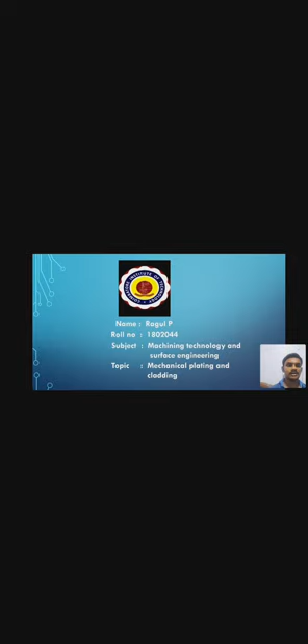So today we are going to see about mechanical plating and cladding. At the end of this video, you will come to know what is meant by mechanical plating and cladding, what are the components of mechanical plating and the types of cladding.

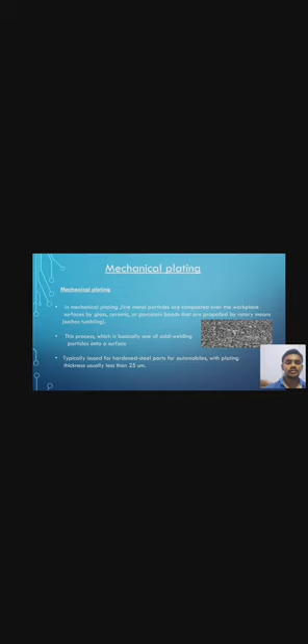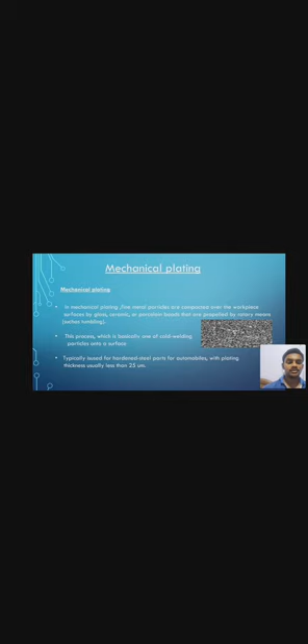So mechanical plating. Mechanical plating imparts the coating by cold welding fine metal particles to a workpiece. Joining takes place without fusion or heating at the interface of the two parts to be welded. Unlike fusion welding, no liquid or molten phase is present in the joint. Typically it's used for hardened steel parts for automobiles with plating thickness less than 25 micrometer.

Next, mechanical plating, other names. Some of the other names are mechanical coating, peen plating, impact coating. As you can see in this picture, glass beads are sprayed along with the metal powder to the surface of the material that is needed to be plated.

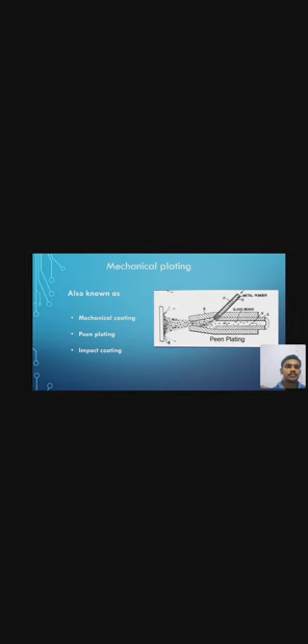Process of mechanical plating. First, descaling and cleaning is done to remove any soil or other particles deposited on the workpiece. They are generally carried out in the tumbler or in a separate cleaning system. After cleaning, the parts are prepared with water, medium, and the surface conditioners. The accelerators and the promoters provide proper chemical environment for the plating to occur, and also maintain pH at 1 to 2 to prevent oxidation and promote adhesion, which is very important.

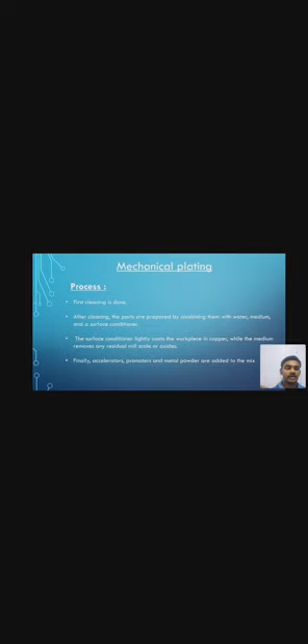Next, coating materials that are used for mechanical plating include zinc, cadmium, tin, copper, and aluminum. Among these five, zinc is the most used coating material.

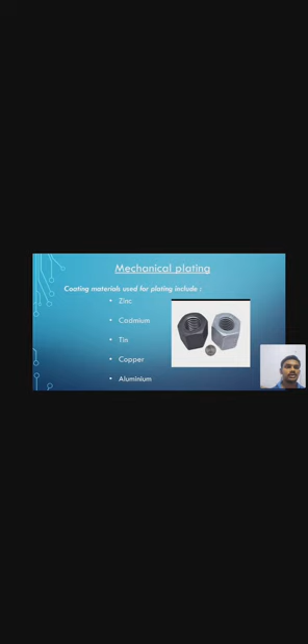Next, components of mechanical plating. First, plating barrels or tumbler. It's the most important part of the mechanical plating machine. It has a tulip design, as you can see, and it's made of steel or stainless steel. It has an acid resistant coated layer on the inside to prevent any corrosion that occurs while pouring of acids or some other components.

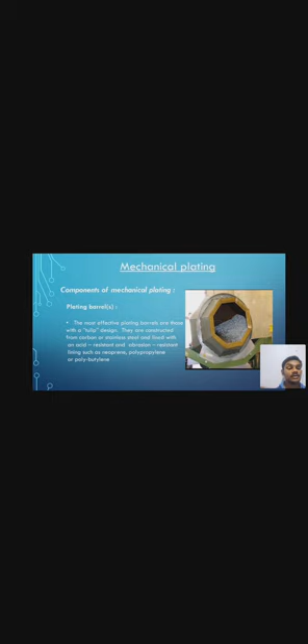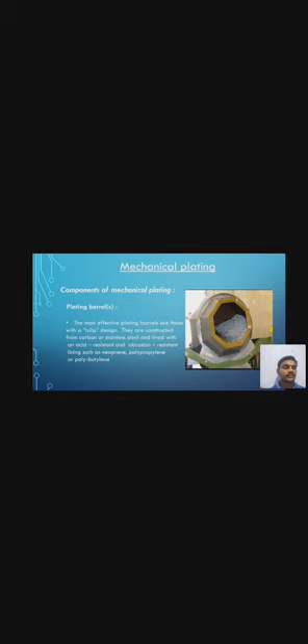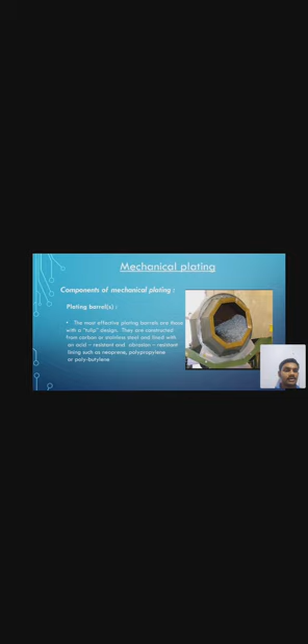So the working volume of the barrel is generally about 25 to 30% of the total volume for most plating processes. The tumbler is usually run at a speed of 60 rpm, but it can also vary according to the needs of the plating. If it runs too fast, then lumpy deposits will form on the workpiece. If the speed is too slow, then the metal powder will not be deposited on the workpiece. So these are some of its drawbacks.

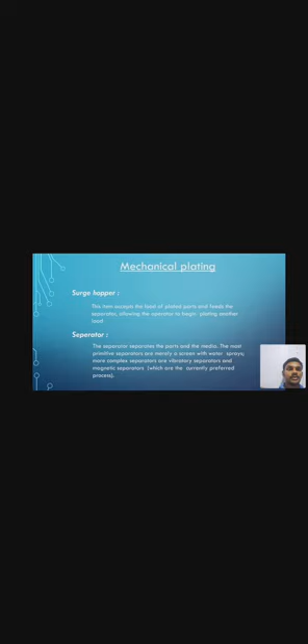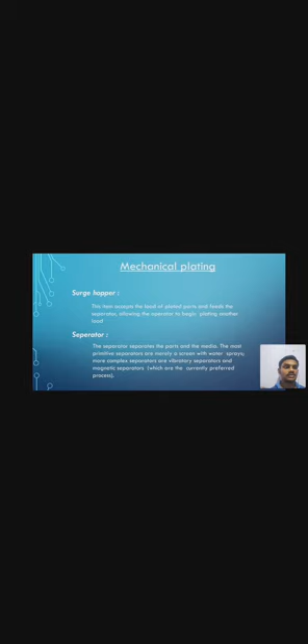Next is the surge hopper. The plated parts come into the surge hopper and then to the separator, allowing the operator to perform the next sets of operations. Separator. Next component is the separator. Separator separates the coated workpiece from the medium after coating. It can be as simple as a screen with water nozzles or as complicated as a vibrating system with magnetic separators.

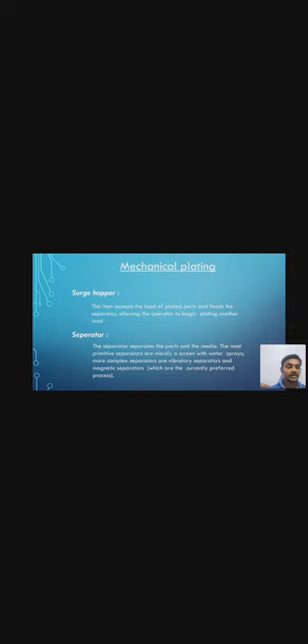Next is the chromator. Chromator is optional, because if you need any corrosion protection, you can use a chromate by spraying with the chromate. Dryer. The next component is the dryer. Workpieces are taken to the dryer to remove any moisture that is present on them. Usually centrifugal dryers are used. However, an oven can also be used for larger parts or loads.

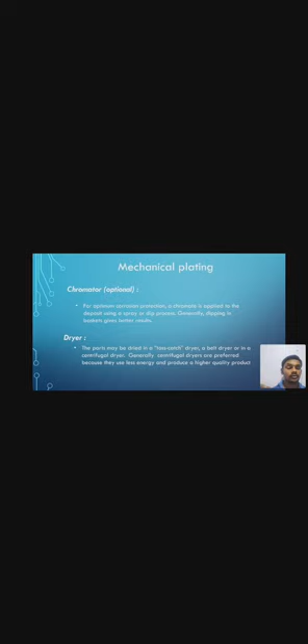Next, it's the typical mechanical plating installation. As you can see, the various components of it.

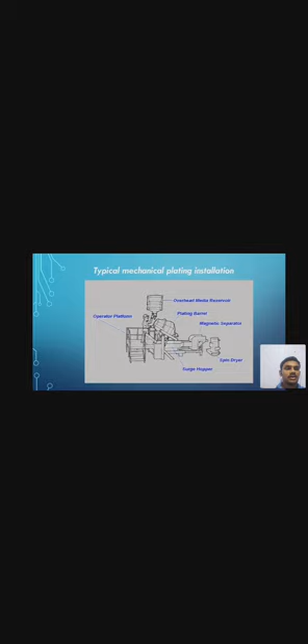Next is the mechanical zinc plating, which is one type of mechanical plating. Mechanical zinc plating is accomplished by tumbling small parts in a drum with zinc and chemicals. Small iron and steel parts are cleaned and flash copper coated before loading into the plating barrel. The barrel is then loaded with chemicals, glass beads, and zinc powder. During the tumbling process, the glass beads peen zinc powder on the part of the material that is being plated. Then the parts are taken out, dried, and then packaged. Usually they are used for parts not suited for hot dip galvanizing.

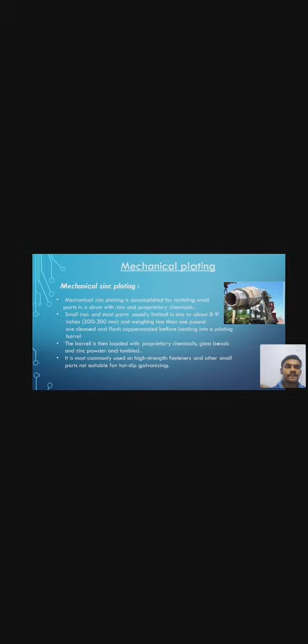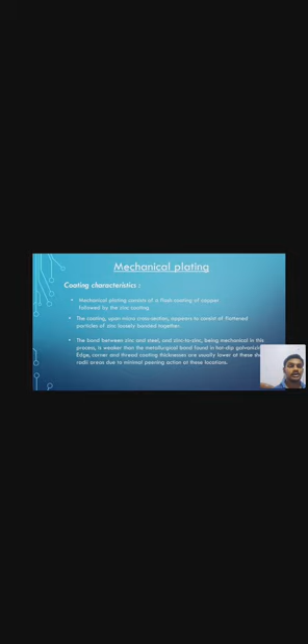Next, coating characteristics. Mechanical plating consists of first a flash coat of copper followed by zinc coating. The coating upon micro cross section appears to consist of flattened particles of zinc loosely bonded together, because in mechanical plating the zinc deposition will be lesser in amount, while in hot dip galvanization the zinc deposition will be 30% more than the mechanical plating of same volume.

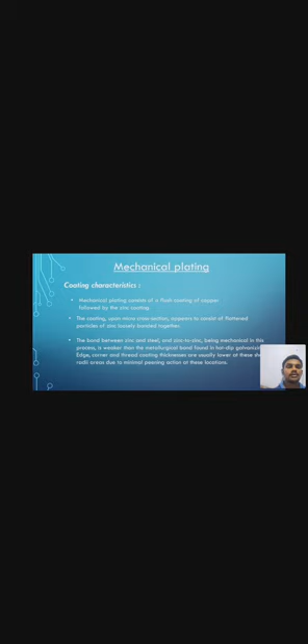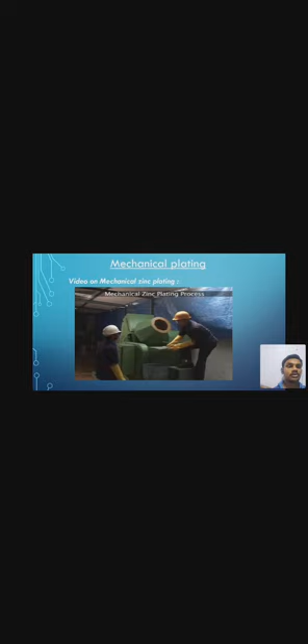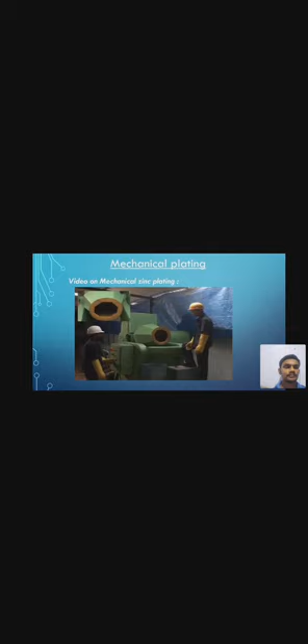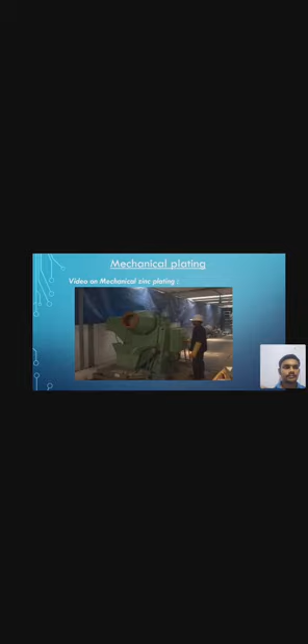Next, it's a video on the mechanical zinc plating process. First you can see the tumbler rotating. Now they will add the workpiece into the tumbler, where other chemical components and the coating materials are present inside. This process eliminates the risk of breakage of high tensile strength disc springs and washers due to hydrogen embrittlement. It is RoHS compliant, which is an environment friendly process. Coating thickness up to 50 microns can be achieved.

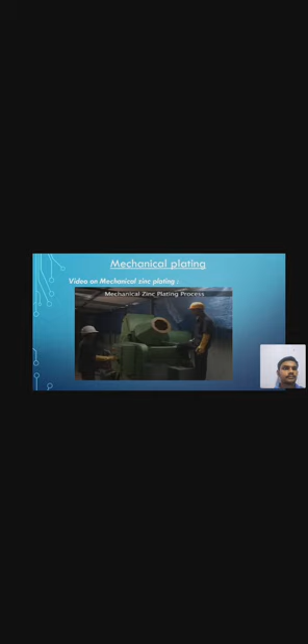Next, the advantages of mechanical plating. One of its primary advantages is that no hydrogen embrittlement is formed in this process. Hydrogen embrittlement is the main reason for cracks and other things that lead to the weakening of the component.

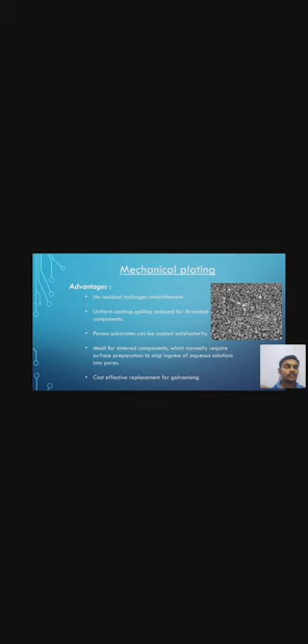In mechanical plating, uniform coating can be achieved, whereas in electrolytic plating it cannot be achieved. Porous substrates can also be coated in mechanical plating. Not only flat surfaces, porous surfaces can also be coated easily. It's ideal for sintered components, which normally require surface preparation to stop ingress of aqueous solutions into pores. It's a cost effective process, and it's also environmentally friendly.

Next, applications of mechanical plating. Some of its applications are nuts, screws, nails, washers, stampings, clips, and hardened steel parts for automobiles.

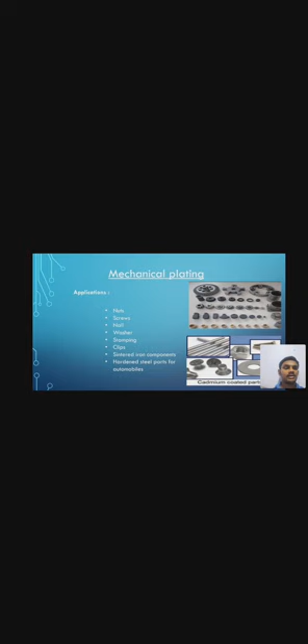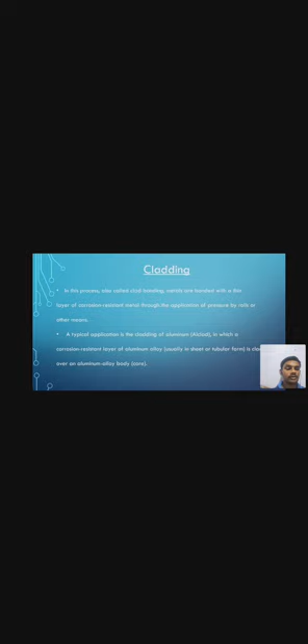Next topic is cladding. Cladding is the bonding together of dissimilar metals. Cladding is often achieved by extruding two metals through a die, as well as pressing or rolling sheets together under pressure. Examples of cladding are 2024 aluminum clad with 1230 aluminum, and 3003, 6061 and 7178 aluminum clad with 7072 aluminum. Other applications are steel clad with stainless steels or nickel alloys.

Cladding is generally of three types. First one is roll bonding. Two or more layers of different metals are cleaned and then passed through a pair of rollers under sufficient pressure to bond the layers. And then explosive welding. In explosive welding, the pressure to bond the two layers is provided by the detonation of a sheet of chemical explosive.

Third one is laser cladding. Laser cladding is a method of deposition by which a powder or wire feedstock material is melted and consolidated by use of a laser in order to coat part of the substrate. It is often used to improve mechanical properties or increase the corrosion resistance.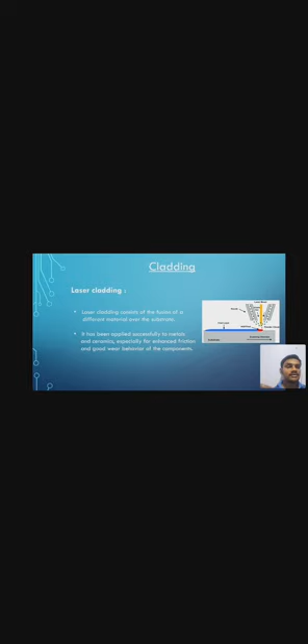In the diagram you can see a powder-like substance which is metallic in nature and is injected into the system by a nozzle. Interaction of the metallic powder and the laser causes melting to occur, which is then deposited on the substrate. It has an advantage that if any defect is there in the substrate, it can also rectify that.